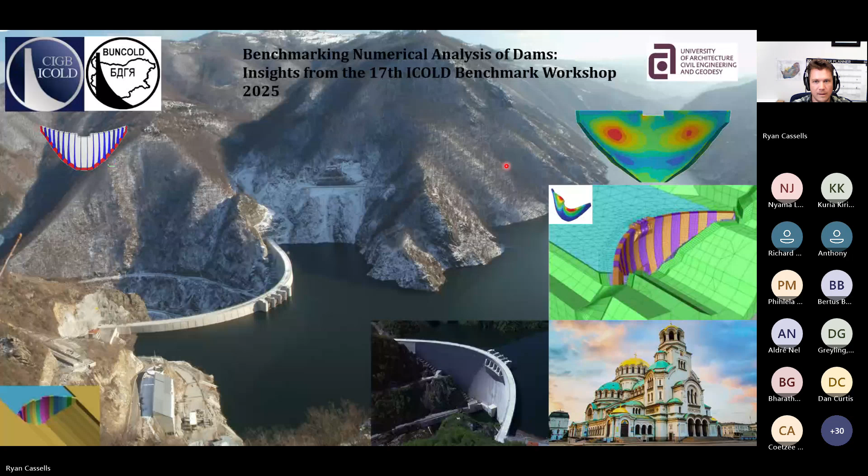Okay, thanks. As Ashley said, I'm Ryan Castles from ARQ Dams. The topic of my webinar: benchmarking numerical analysis of dams, insights from the 17th ICOLD Benchmark Workshop.

Various organizations play a part here. It's hosted by BUNCOLD, which is the Bulgarian National Committee of Large Dams, a member of ICOLD, in association with the University of Architecture, Civil Engineering, a technical university in Sofia. This benchmark workshop was also an official ICOLD event.

Quickly going through the presentation structure: I'll start by looking at the introduction and background for those of you who don't know what a benchmark workshop entails. I'll run through the objectives and scope of the workshop, look at the topics that were studied, as well as the various contributors and participants. I'll look at the modeling approaches and results, highlight some of the key findings, and quickly discuss the site visit that they did, which unfortunately I was not there for, but it was quite interesting. I'll also look at some extras as a bonus, and end with a conclusion.

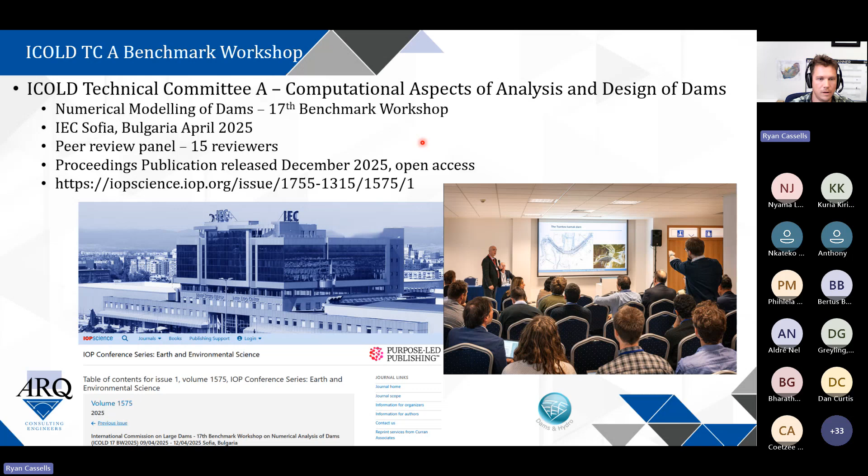The ICOLD Technical Committee A, as Ashley said I'm the South African representative there, was formed in 1988 by ICOLD. The objective and goal was to verify correct implementation of theory, based on the finite element method in dam engineering. Just to stress, this is structural analysis, finite element modeling, not computational fluid dynamics, which a lot of dam engineers also use, but that's more in terms of hydraulic flow. This is strictly finite element modeling for structures.

The benchmark workshop is held every 2 years. I think the first one was in 1991. After that, they normally do capitalization of the findings and publications. There are also bulletins released every now and again by Technical Committee A: Bulletin 94 from 1994, Bulletin 122, 155, 202, and 206. These bulletins all basically give information related to numerical modeling of dams.

The chair of the committee is Antonella Frigerio, she's from Italy, and the co-chairs are Russell Gunn, a Swiss gentleman, and Gerald Zenz from Austria. There's a photo of me when I attended the benchmark workshop - Antonella, the lady with the black hair, to her right Gerald, and to her left Russell, and obviously you can see me.

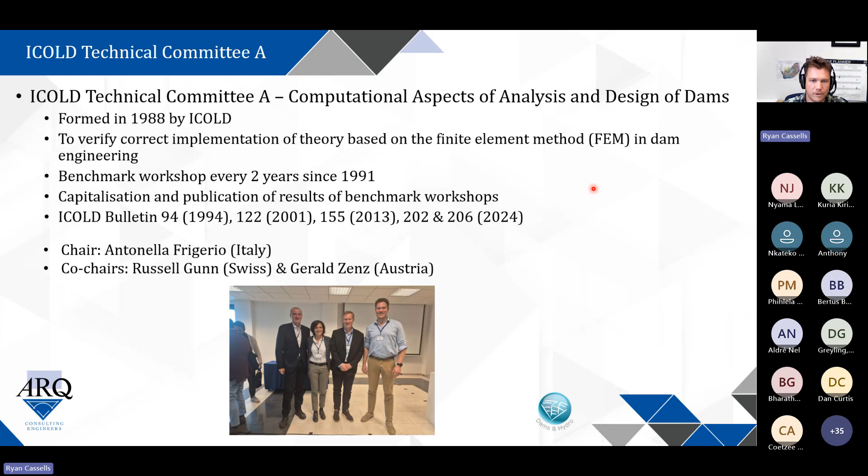As I said, the benchmark workshop was hosted by BUNCOLD, the Bulgarian National Committee of Large Dams. They've been a national member of ICOLD since 1938. The chairman is also a professor at the UACEG, which is one of the event organizers - his name is Dimitar Kislyakov. The vice chairman is Dimitar Popov, and the honorary chairman is Dimitar Chashev. So I think if you live in Bulgaria, there's a high probability your name will be Dimitar. A photo on the left shows the building at the university. The benchmark workshop took place in Sofia, Bulgaria, which is the capital of Bulgaria, in Eastern Europe.

Interesting enough, it's one of the oldest European cities. It's been inhabited for 7,000 years. It's actually older than Rome, Paris, and London.

The city is located directly next to the Vitosha mountain in the Balkans mountain range, so ideal setting for dams. Bulgarians love yogurt, and they swear by getting longevity from it. They also enjoy drinking rakia, a fruit brandy, socially, and they swear by it as a cold remedy.

Some of the photos in the middle show the city skyline with the beautiful mountains in the background. A map shows where Bulgaria is and the capital, Sofia. On the right, a famous photograph of the Alexander Nevsky Cathedral.

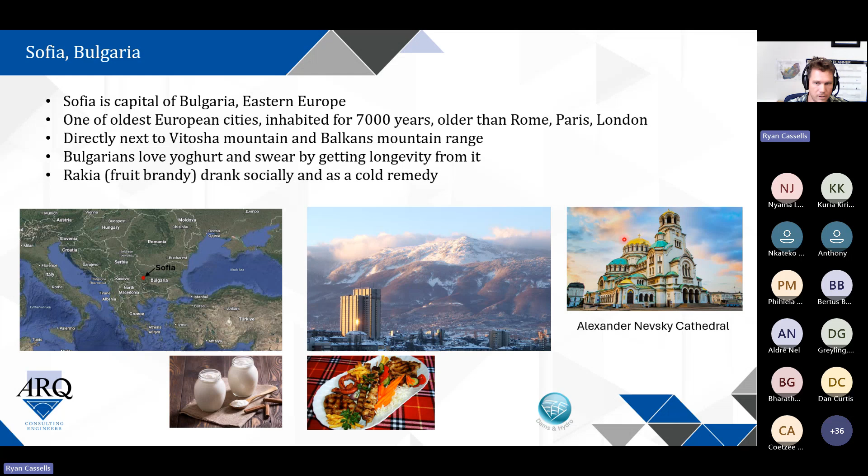Let's go to the next slide. Sofia is also rich in culture and eclectic architecture. You can see all the beautiful colors of the different buildings. The city is also located above natural hot springs, so when you walk around the city, you'll see various points where people are able to freely collect heated spring water from taps.

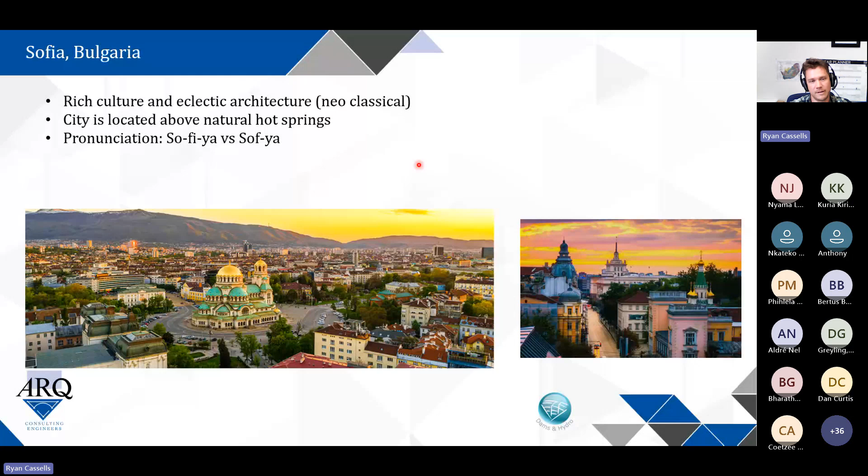One of the things that Henry John joked with me about before I went is that in Sofia there's a bit of a thing about how the name of the city is pronounced. Is it Sofia or Sofia? I can't remember which is correct, but I know some locals get irritated by tourists. I think the correct pronunciation is Sofia, but a lot of people say Sofia. Just an interesting fact.

Okay, let's get to the dam. As I said, Bulgaria is a very mountainous area, perfect conditions for dam building. Some of the notable large dams in Bulgaria: the Vacha Dam, a 144-meter high concrete gravity dam, on the left photo. The Studen Kladenets Dam, in the middle, a 68-meter high concrete gravity dam. The Kardzhali Dam, top right corner, a 103-meter high concrete arch dam. And the Tsankov Kamak Dam, 130-meter high concrete arch dam. So there are some really cool dams in the area.

The dam on the bottom right actually features in the benchmark workshop studies, so we'll unpack that dam a little bit more.

So how would one define a numerical modeling benchmark workshop? It's an international gathering of numerical modeling experts in structural dam engineering. The contributors undertake predefined numerical analysis studies of selected dams. The model parameters, assumptions, and analysis considerations are normally, to a large extent, standardized.

This is to try and pick up if there are differences in the outputs, not necessarily from different modeling assumptions, but to find where these differences arise from and what causes them. Contributors undertake these studies using their preferred numerical modeling software and processes.

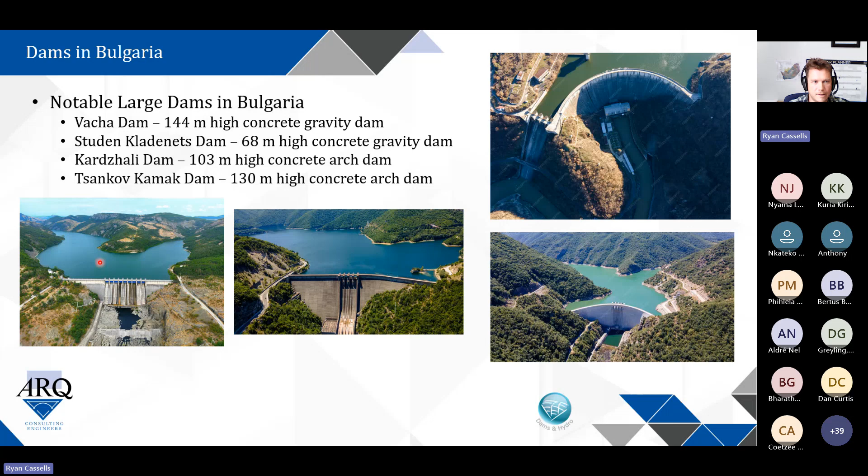The aim and objectives of a numerical modeling benchmark workshop are to compare study outcomes and results between contributors and FEA software packages, to identify and explain significant differences between the outputs and results, and to provide analysis reference points for newly developed software, newcomers, or participants.

For instance, if you're a dam engineer venturing into numerical modeling with a complex problem, and you want to buy a new software package, how do you test it? You can use the benchmark proceedings for that.

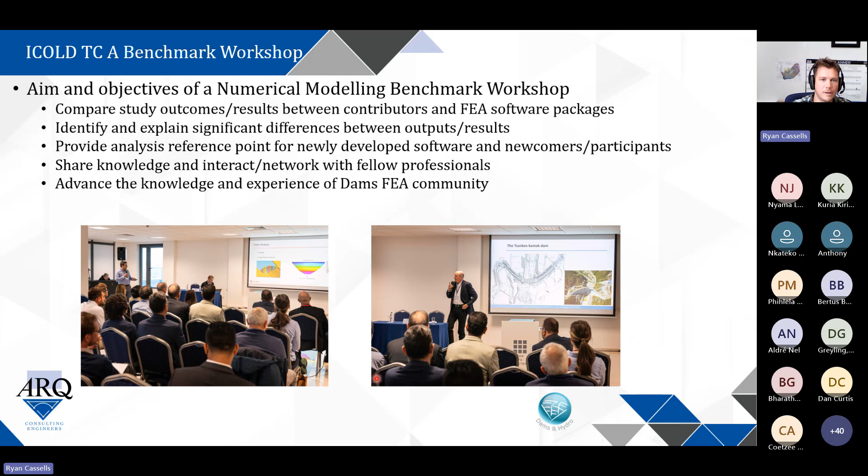As I said, there have been various benchmark workshops before this one. Other objectives include sharing knowledge and interacting or networking with fellow professionals, which is also the main purpose of this webinar - for me to share what I learned at the workshop with SANCOLD members, and to advance the knowledge and experience of the DAMS FEA community.

So the workshop structure and content: basically, prescribed FEA studies are formulated by the TCA, Technical Committee A, defining analysis requirements and reportable results. The formulation is released online in advance together with workshop dates and a venue.

Interested contributors can undertake these studies using their preferred numerical modeling software. To partake in a benchmark analysis in a workshop, you don't need to be a member of ICOLD or SANCOLD. It's free for anyone to participate.

The formulations are normally freely uploaded or available on the ICOLD website, or the ICOLD website will refer to the specific website set up for the benchmark workshop.

The analysis results derived by contributors are submitted to the organizers. So once all the various contributors do their work, they submit it. The organizers assimilate, evaluate, and summarize the findings and make comparisons between the outputs. The organizers and contributors then present the findings in a conference-style workshop, and eventually the proceedings are published.

Just for interest's sake, for this workshop there were 13 contributors from 9 countries, and over 50 workshop participants. So you can either be a contributor or a participant. If you're a contributor, you actually take part in the exercises, or you can just be a participant, pay the fee, attend the workshop, and learn from it.

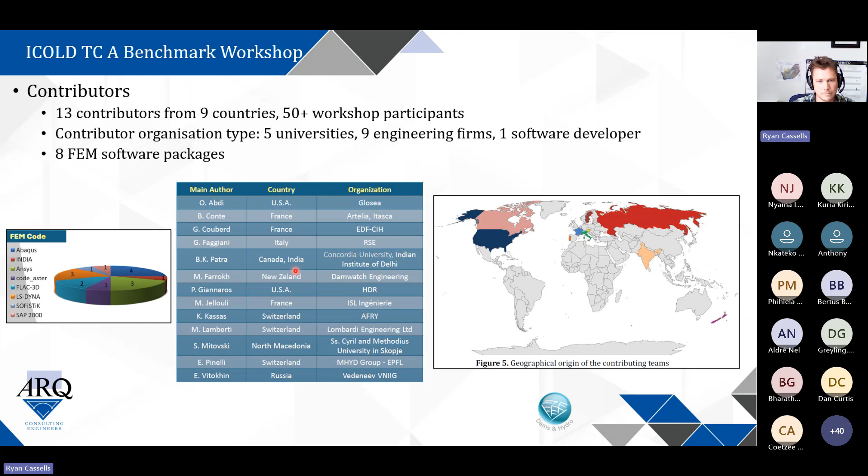The workshop had 3 themes. Each of these themes is represented by a different type of dam. Theme A was 3D seismic analysis of the Tsankov Kamak concrete arch dam, which I showed you a bit earlier.

Theme B looked at the first impoundment of the Plovdivtsi embankment dam, which is an asphalt concrete core rockfill dam. Theme C was calibration and prediction of the rockfill behavior of the 210-meter high Nam Ngum CFRD dam. That's actually not in Bulgaria - that dam is located in Laos, but the dams for Theme A and Theme B are Bulgarian dams.

You can see the photographs: on the left, the Arch Dam; in the middle, the Plovdivtsi Dam; and on the right-hand side, the Nam Ngum 3.

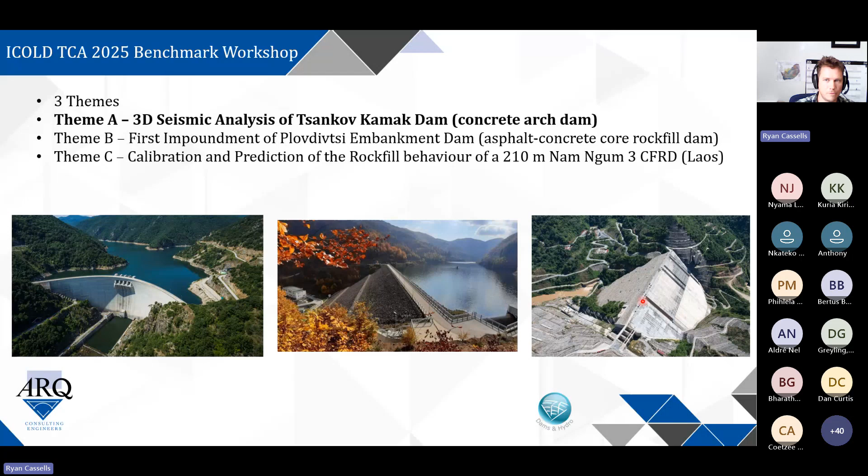For purposes of this webinar, I'm only going to look at Theme A. There's quite a lot to unpack, and it would be impossible to do all themes in 1 hour. But the proceedings are there, and for those who want to look at the embankment dams and the rockfill dams, you're more than welcome to have a look at that.

So that Tsankov Kamak Dam: 130-meter high double curvature concrete arch dam, 486-meter crest length, reservoir capacity of about 100 million cubic meters, spillway capacity of 1,450 cumecs, hydropower capacity of 80 megawatts, and rock mass geology comprising metamorphized biotite gneisses.

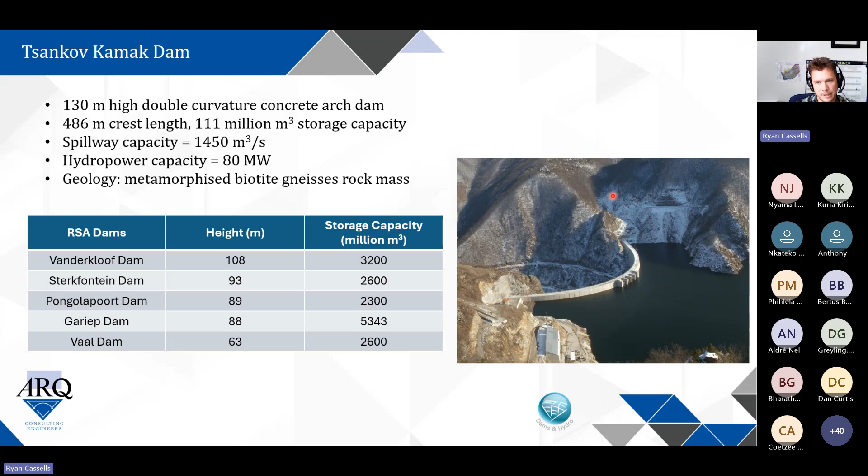Just to compare the size of the Tsankov Kamak Dam, as I said, 130-meter high, in the table I've got 5 large dams in South Africa: Vanderkloof, Sterkfontein, Pongolapoort, Gariep Dam, and Vaal. You can see that in terms of the height of the structure, the Tsankov Kamak Dam is really a big dam, larger than all our largest dams. But obviously, if you just look at reservoir capacity, it's not as much as what our dams hold. Purely from a structural point of view though, it's a very large dam, 130-meter high.

So Theme A, as I mentioned, is the 3D seismic analysis of Tsankov Kamak Dam. The objective and purpose of Theme A is to identify and evaluate findings that contribute to the development and better application of advanced methodologies for static and seismic analysis of concrete dams, to compare results from linear and nonlinear analyses, to compare analysis results across different modeling approaches and software - highlighting similarities and discrepancies - as well as to understand the potential for various modeling approaches or software to yield results having quite a broad spectrum at times, and also to allow engineers, researchers, and software developers to discuss their solutions to given analysis problems.

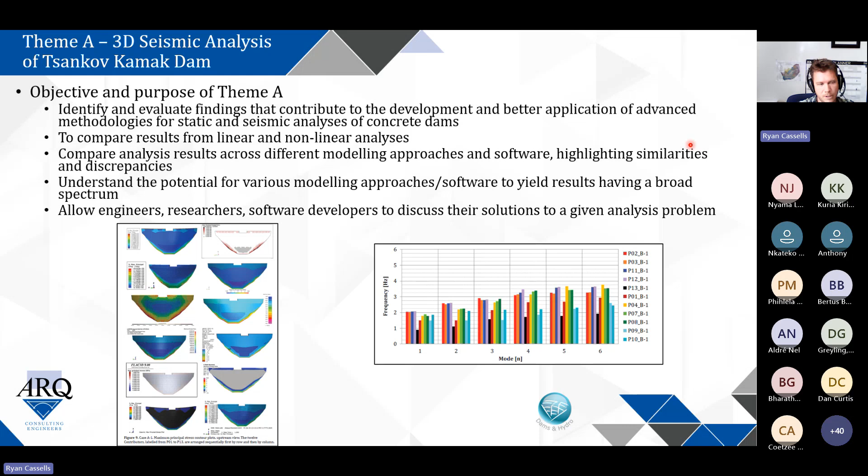Here are just 2 images, plots taken from the proceedings. I'll go through the details of these later.

Theme A had 6 case studies looking at different loading conditions. Obviously these case studies also had sub-case studies, so you can see there's quite a lot of analyses taking place here for the contributors.

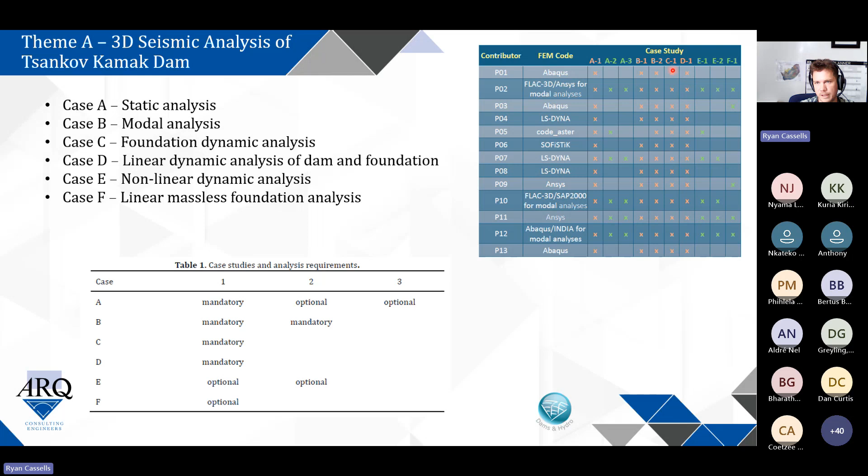On the table on the right-hand side, the contributors are divided into numbers. Random numbers were assigned just to not expose the various participants in terms of their name or organization. You get contributors P1 to P13, the FEM code that they used, and which of the case studies they actually undertook under theme A.

Case study A1 is a monolithic linear analysis of the dam. Case study A2, a nonlinear analysis, adopting nonlinearities at the contraction joints between the blocks of the dam, with the intention of getting a stress distribution there. Case A3, nonlinear analysis at block interfaces and at the dam foundation contact.

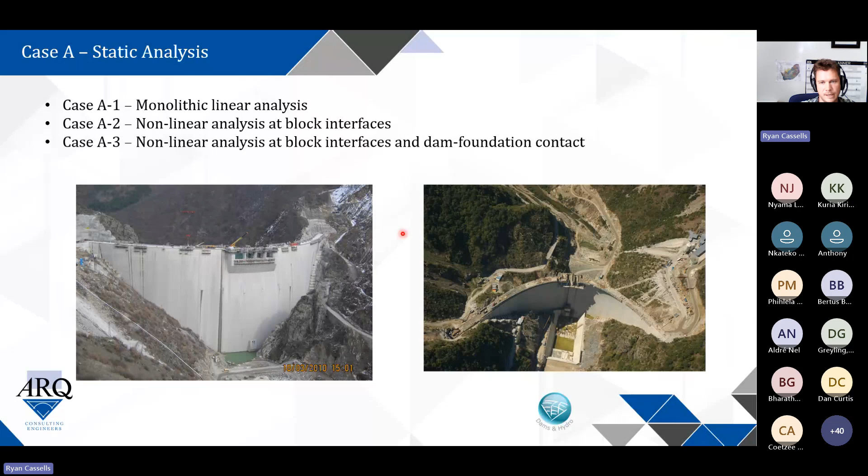Some of the dam and reservoir data that needs to be input for the modeling: the dam crest elevation, 688 meters above sea level, dam crest length 486 meters, the crest thickness, base thickness - don't need to go through all of them. What is applicable is the annual average water level of 679 meters above sea level, considered your normal loading conditions for this analysis. So for static and hydrodynamic loading, this is the number to consider.

The dam body details: the dam body is a parabolic arch profile, containing 300,000 cubic meters of concrete. The dam was constructed with 23 blocks or monoliths, each 20 meters wide. Between the blocks at the contraction joints, 100 millimeter shear keys were constructed to get monolithic behavior across the arch, and the joints were later grouted as well.

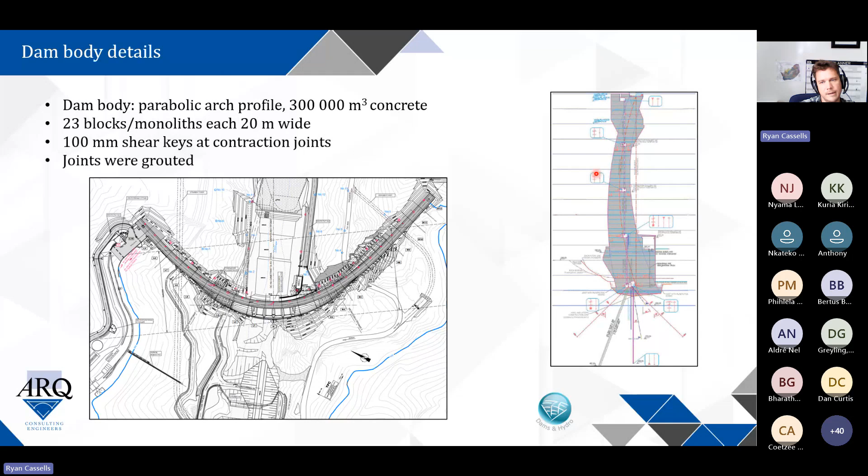Here's a nice plan view of the dam arch showing the setting out of the site, the contours, the valley. On the right-hand side, a cross-section of the crown or central cantilever, which is basically the tallest or highest part of the dam, the deepest portion of the river valley.

For contributors taking part in the analysis, the mesh of the dam and foundation was actually provided. This is to try and eliminate differences in analysis results from people having different meshes, different element types. So geometry was provided as well, but a mesh of the dam and foundation was provided for the contributors to use in their analyses.

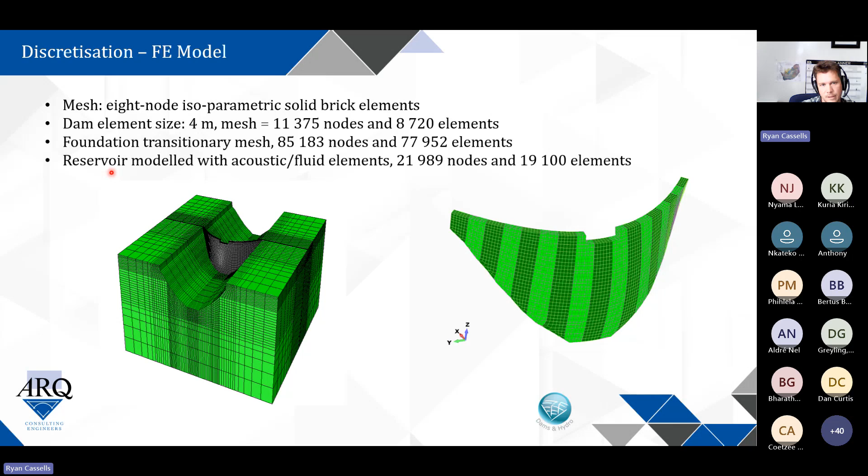The mesh comprised 8-node isoparametric solid brick elements, the dam element size being 4 meters. You can see on the right-hand side the mesh of the dam, very nice, neat mesh, good aspect ratio. The foundation transitionary mesh has 85,000 nodes and 77,000 elements, and the reservoir was modeled with acoustic or fluid elements, 22,000 nodes and 19,000 elements.

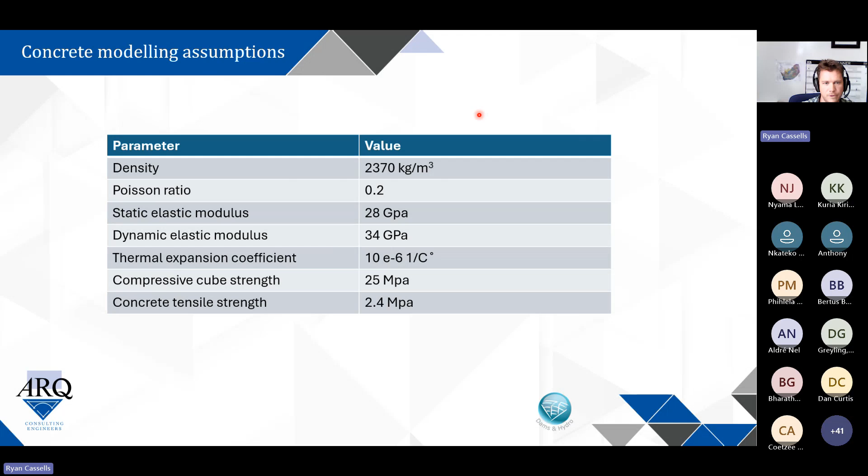The concrete modeling assumptions given to the contributors: density of concrete 2,370 kilograms per meter cubed, Poisson ratio 0.2, static elastic modulus 28 gigapascals, dynamic elastic modulus 34, thermal expansion coefficient 10 e to the minus 6, compressive cube strength 25. So it's all quite standard concrete properties.

The foundation modeling assumptions: density 2,675 kilograms per meter cubed, Poisson ratios, then your rock mass shear strength - a cohesion of 1.5 MPa and a friction angle of 60. You can clearly see that's quite high shear strength parameters indicating nice competent rock mass, and a static elastic modulus of 28 and dynamic 34, derived from a shear wave velocity of 2,220 meters per second.

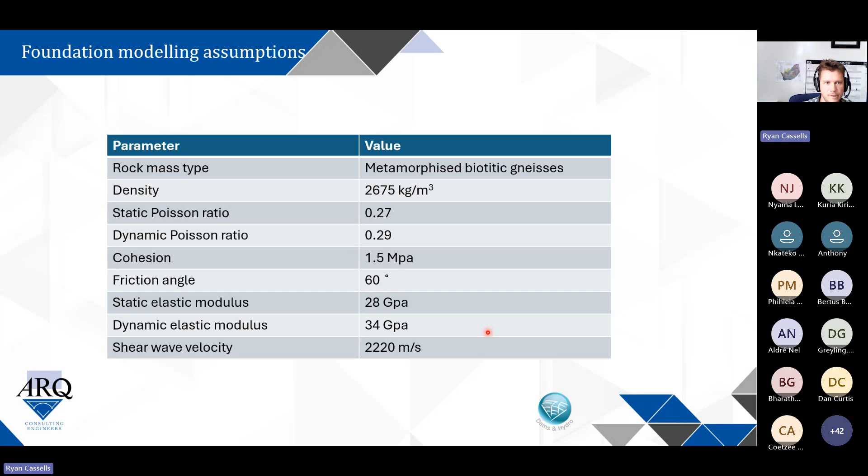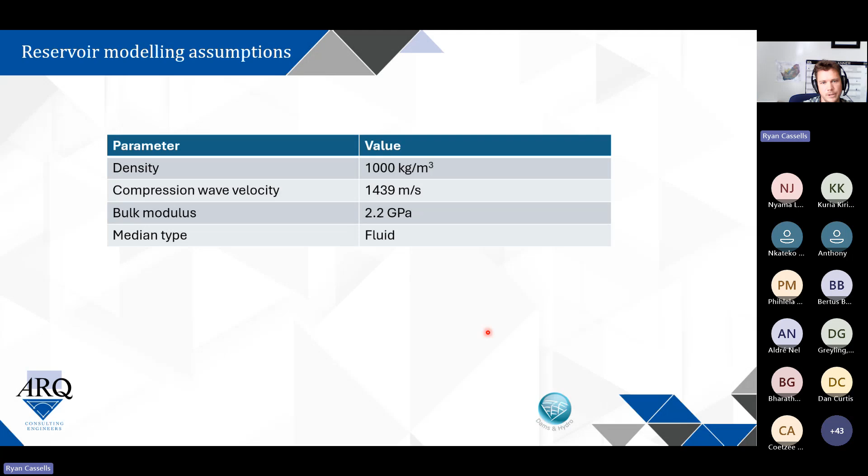The reservoir modeling assumptions: the density of water 1,000 kilograms per meter cubed, pretty standard. Compression wave velocity 1,439 meters per second, the bulk modulus 2.2 gigapascals, and the medium type fluid.

Okay, so for case study A1, analysis assumptions: monolithic linear static analysis. So not modeling any nonlinearities, not at the contraction joints, nor at the interface between the dam and foundation. The dam concrete modeled as linear elastic.

The loading: hydrostatic, gravity, and drained uplift. And the foundation extents restrained against translation. So it's all quite standard and normal hydrostatic, linear elastic analysis.

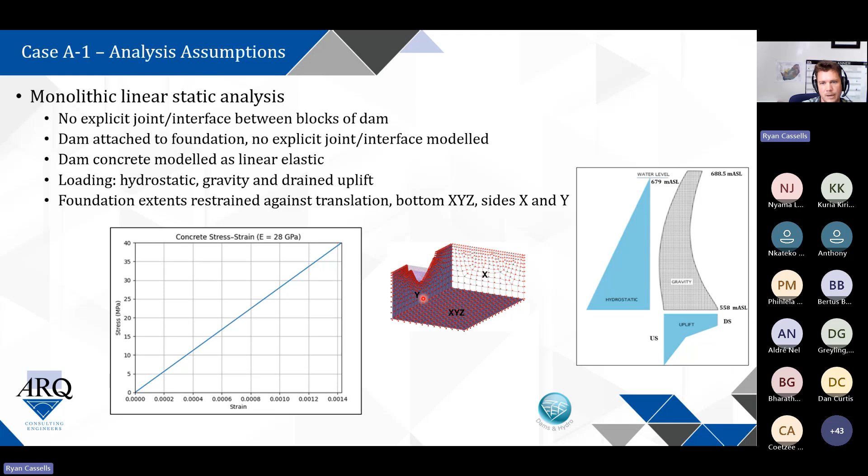Other required results from the contributors being the minimum and maximum hoop stress on the downstream and upstream face, as well as the minimum and maximum vertical stresses also on the upstream and downstream face of the central cantilever, and then also contour plots of the major principal stresses. Normally these major principal stresses give us an indication of where we can expect tensile stresses to develop in the dam.

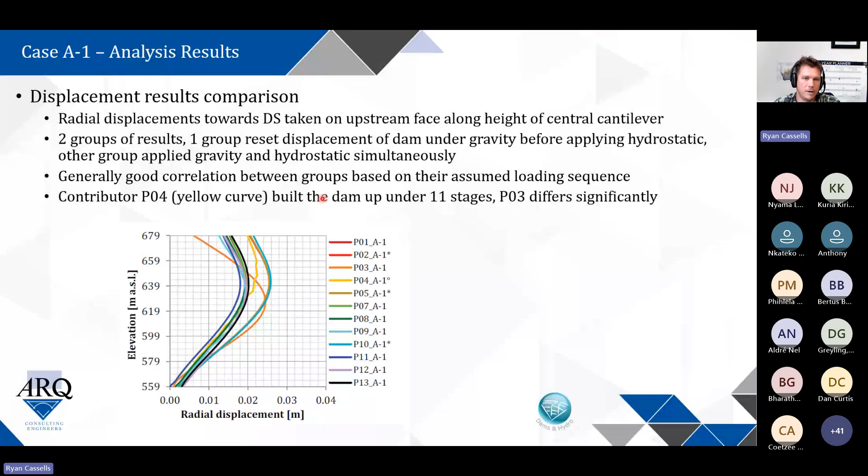P3 also, the orange curve, showing quite a lot of difference from all the rest of the contributors. But generally you can see there's a good correlation between the groups, both based on the assumed loading sequence, apart from P3 really.

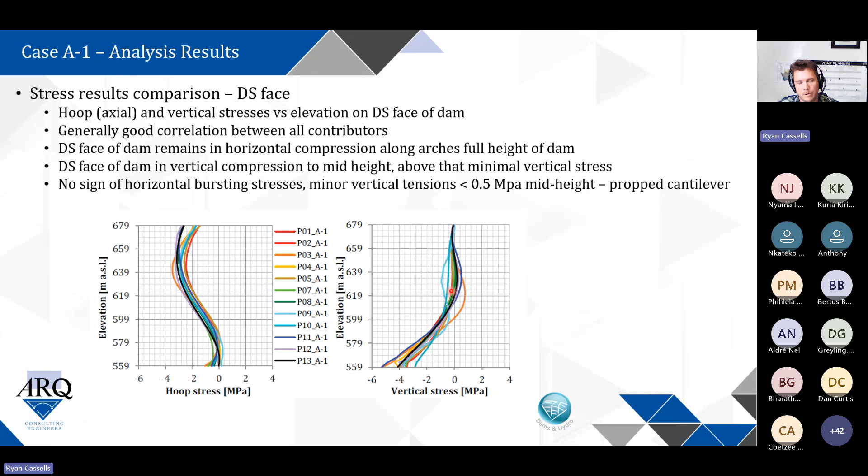There's also no sign of horizontal bursting stresses. There are minor vertical tensions that form just above mid-height of the dam, in the region of about 0.5 MPa. This is just due to the structural propped cantilever effect - basically you've got a cantilever which is supported by a spring. The arches provide stiffness to the cantilever, so you get a little bit of tension developing there, as you would if you had a propped cantilever with a hogging moment.

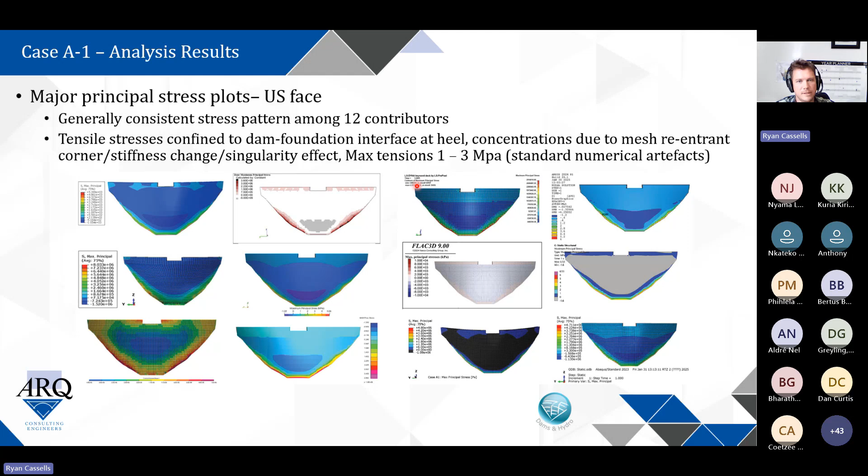Case study A2 is basically the same as case study A1, except that nonlinear material modeling properties were adopted at the contraction joints between the monoliths. It's basically an explicit joint given a very low tensile strength, as close to possible to 0. The normal and shear stiffnesses were given a value of 1 to the 12 pascals per meter. This is all according to the inputs from the organizers. The dam is still attached to the foundation, so there's no explicit joint at the dam foundation, only between the actual blocks. The loading, again, is just hydrostatic, gravity, and uplift.

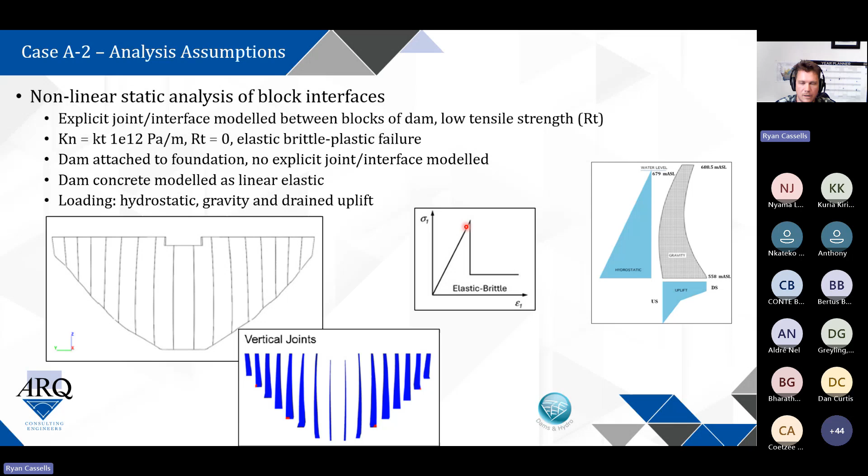There's a typical material model showing elastic brittle behavior, so you get a linear elastic stress-strain curve until the point of failure, and then a large drop in the stiffness.

Again, generally a good correlation. The results between A1 and A2 don't differ drastically - there are small differences, which is expected because there's not much tension really forming across those contraction joints, as would be the case if this was a seismic analysis, which we'll get to later. But under normal loading conditions, hydrostatic, most of the stresses stay in compression.

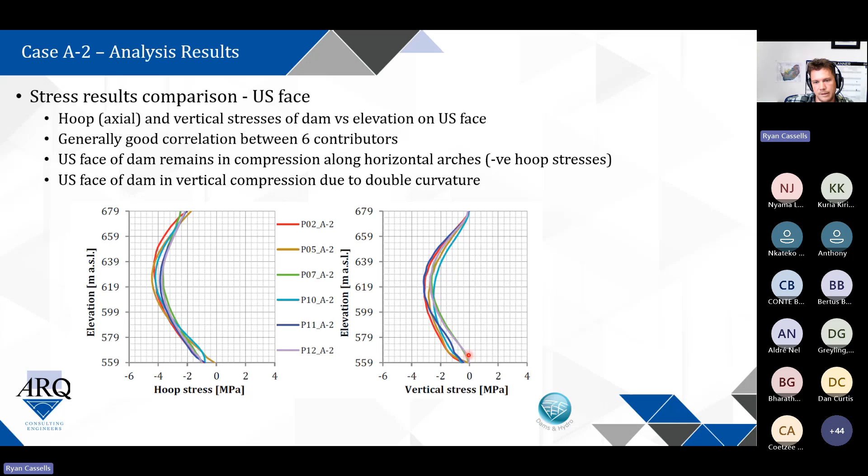What is interesting to note is that on the upstream face at the heel of the dam, you don't get that development of large excessive tensions which we showed earlier. This is because there's no actual discrete joint model at the dam and foundation, but that tension is actually released across the expansion and contraction joints. So that's why you don't get any tensions forming over here.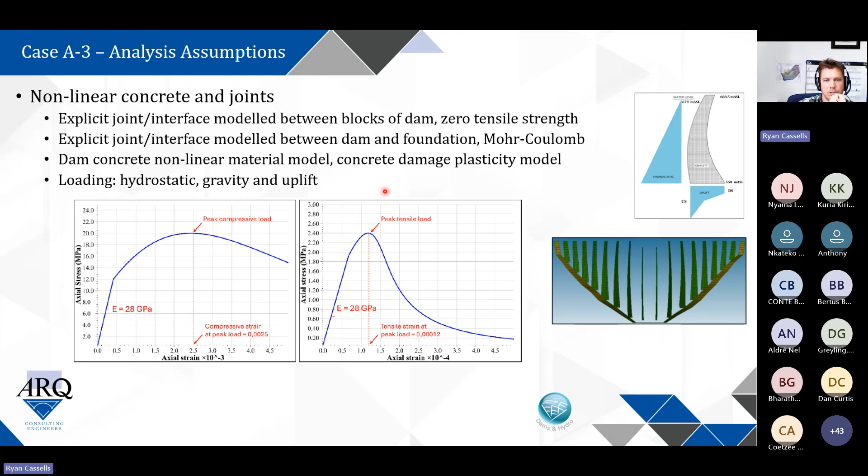The displacement results comparison is very similar again to the previous ones. This time we only had 5 contributors submitting for case study A3. The results don't differ much between A2 and A3. Once again, there's not a lot of tension under normal loading conditions, so you wouldn't see large differences.

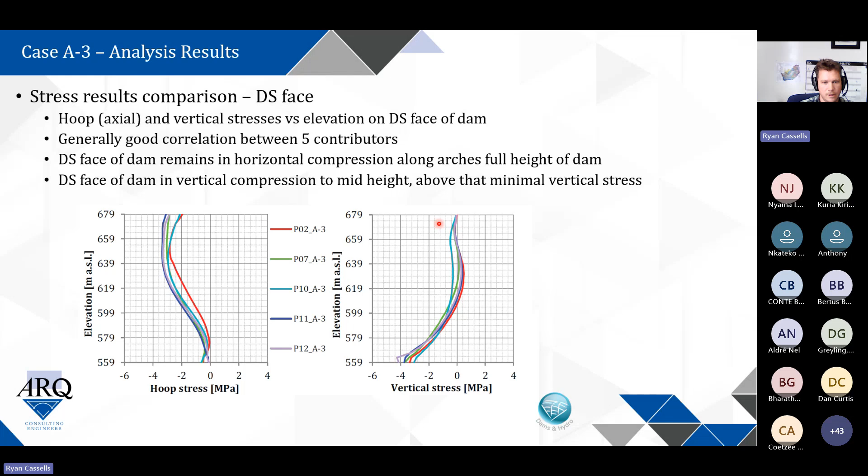Stress results on the upstream face, similar thing, don't need to repeat that. On the downstream face as well, hoop stresses on the left, vertical stresses on the right. So for case A findings, that's the end of case study A.

Stages of hydrostatic loading affect the displacement of the dam. The displacement of the dam under gravity is normally built out in real life, but it also depends on the impoundment strategy - is the dam built and impounded at the same time? For instance, at Katse Dam, that's how they did it. Other dams are constructed to crest level and only impounded later. So it all depends on what the construction sequence is.

Linear elastic hydrostatic loading of concrete arch dams indicates exaggerated tensions at the heel. I actually did a paper presenting this in 2024 for SANCOLD with my co-author, Dr. Wright. So you can see the stuff we've been presenting at SANCOLD correlates quite well with what the guys are doing at the benchmark workshop.

Use of nonlinear material models allows for redistribution of tensile stresses at the heel and across the joints. If I remember correctly, I think that was for the Olifantspoort project where I presented that. So that's quite a useful feature, using nonlinear material models.

What is important is that the selection of a nonlinear material model is very critical to how the stresses are redistributed. There are obviously so many different types of models out there. You need to make sure you select a model that really represents your site conditions and one that's been tried and tested, and do some V&V analysis just to see what comes out. There's also various nonlinear models for modeling the brittle fracture behavior of concrete.

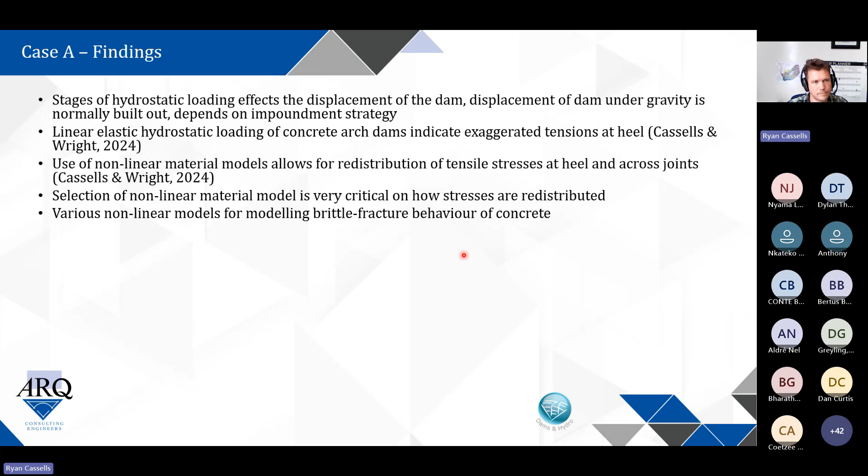Moving on to case study B, which is a modal analysis. Case studies B1 and B2, the only difference being that case B1 incorporates a foundation with mass, while case B2 is a massless foundation. The outputs required were the first 15 natural frequencies of the dam, the corresponding mass participation for each of these mode shapes, and the dam mode shapes for the first 5 natural frequencies were also required.

Basically, modal analysis is quite a straightforward thing - it's just an eigenvalue analysis. This is normally one of the first steps you would do if you were to do a dynamic analysis, or specifically a seismic earthquake analysis. This gives you an indication of

how the dam will respond under seismic loading in terms of what its natural frequencies are and the mode shapes. You can then compare this to the frequency content of your acceleration input or earthquake input, and you can get a good indication of the sort of excitation you'll get under seismic loading. You also need this to look at or define your damping, to see where the mass participation is.

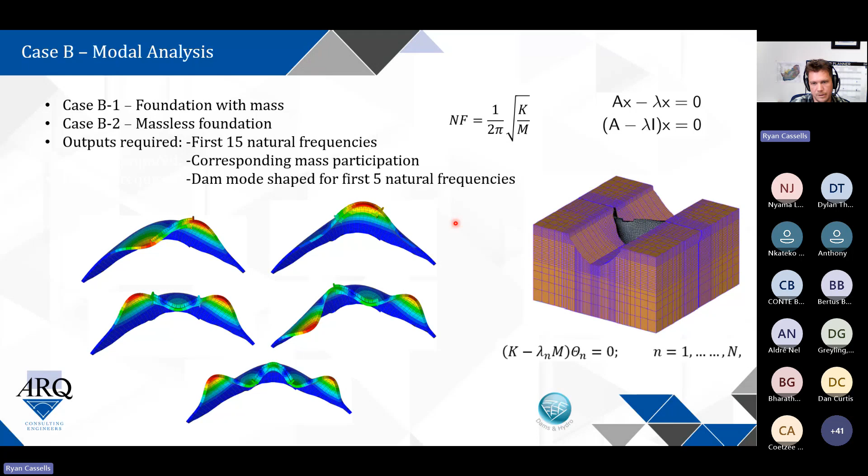For Rayleigh damping, we go to some structural dynamics equations. The natural frequency is a function of the square root of your stiffness over your mass. Here's the eigenvalue function, lambda, to solve your eigenvalues - basically your different mode shapes and frequencies as indicated here.

So what's important here is that when doing the modal analysis, you need to model the dam, foundation, and reservoir, because under seismic excitation, the whole dam-foundation-reservoir system acts as a coupled structural system, and they will interact with each other.

There are various techniques to actually model your fluid-structure interaction. Different software use different approaches. As you can see, this table summarizes the software codes as well as the fluid structure interaction approach and the fluid type used by the various participants, contributors P1 to P13. Again, Abaqus, ANSYS, Code Aster - all the well-known software are there.

For fluid structure interaction, a lot of people still like to use Westergaard added mass. Obviously there are pros and cons for that. You can also use acoustic mechanical coupling.

You can model the actual reservoir as a fluid body, or you could use acoustic elements, depending on what's available in your software. And the fluid type can be modeled as incompressible or compressible.

So for Westergaard added mass, basically you're just adding mass to the structure, so you're not getting a stiffness effect. It sees the reservoir as incompressible, and it's like sticking the reservoir to the upstream face of the dam, providing additional mass to the structure. Theoretically speaking, acoustic or fluid elements are more mathematically correct, but it's been shown that

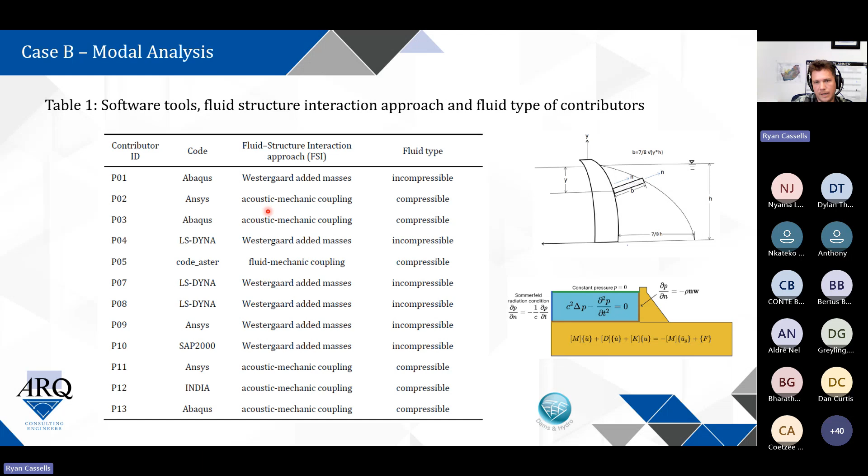Westergaard added mass generally also gives good results. The results for the modal analysis, natural frequency results comparison.

This is again case B1, which is a Mass Foundation. You can see the first 15 modes, all contributors, the contributors using advanced FSI fluid structure interaction, and the contributors using Westergaard added mass. The organizers actually split them, knowing that you'll get significant differences.

Let's just look at the first mode. For all contributors, the mean natural frequency is 1.76, the median 1.85, and the standard deviation 0.36. Contributors using Westergaard added mass have a marginally lower natural frequency, because there's more mass, whereas for fluid structure interaction the natural frequency is marginally higher than Westergaard added mass.

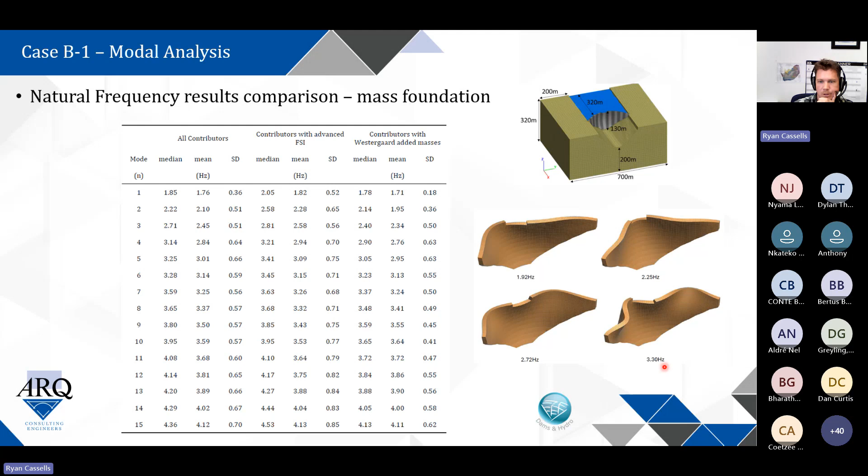Some images just showing some of the outputs of the mode shapes for the dam. Frequency is 1.9 hertz, 2.2, 2.7, 3.3 — so that's mode shape 1, 2, 3, 4.

This bar graph shows a direct comparison of the first 6 modes of the various contributors. You can see again there's good correlation between the natural frequencies. For mode 1, these contributors had close to 2 hertz, and these contributors were quite similar, apart from contributor 13, the black bar chart, which shows significantly lower natural frequencies than all the other contributors.

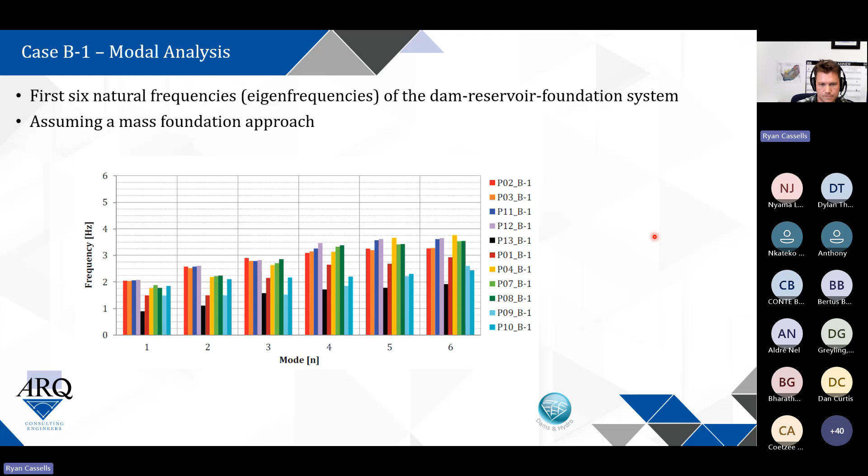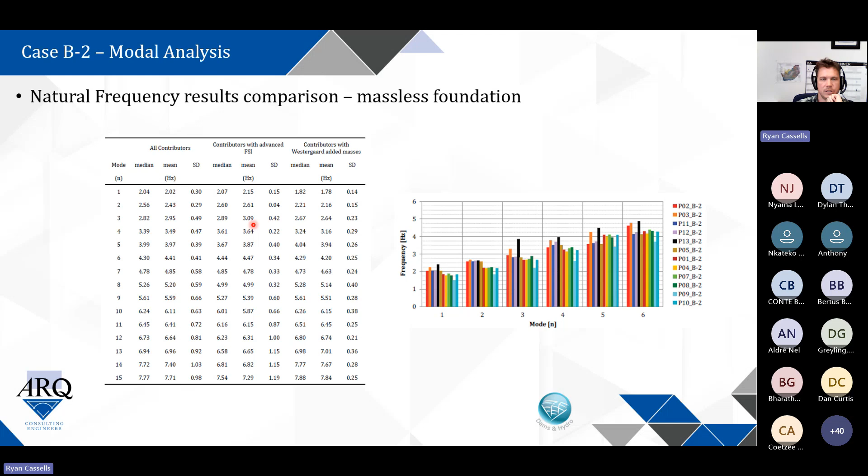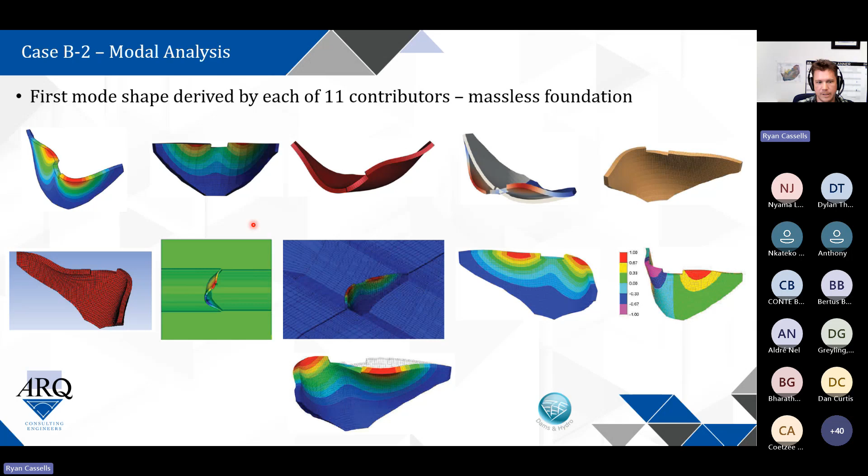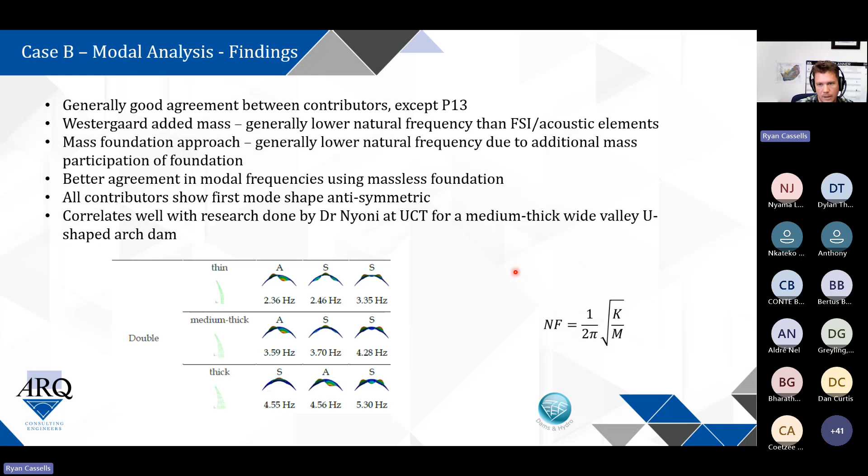This actually correlates very well with research done by Dr. Nyoni at UCT for a medium thick wide valley U-shaped arch dam. Dr. Nyoni and Prof. Moyo at UCT have done extensive studies on mode shapes of arch dams in relation to the valley width and the thickness of the dam, and whether it's double or single curvature. Here you can see for a double curvature arch dam with a medium thick arch, the first mode is normally antisymmetric, which correlates well with what was shown here at the workshop. So what we're doing in South Africa ties up very well to what the guys are doing at the benchmark workshop.

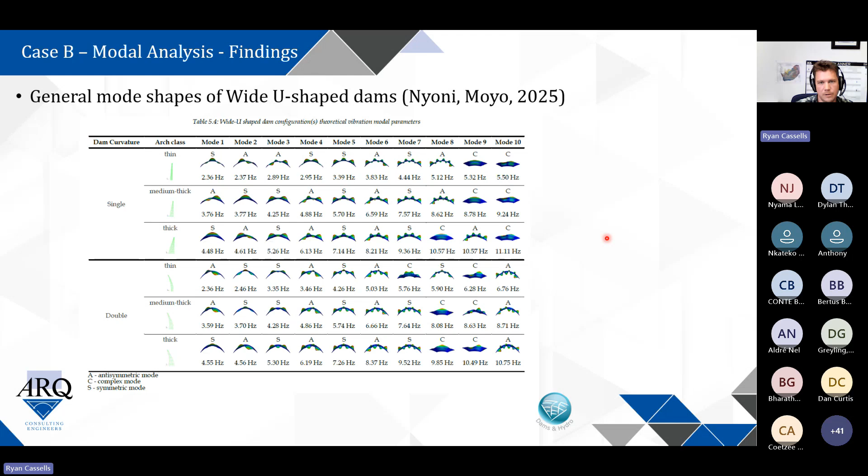So basically, in order to do a seismic analysis of a dam correctly using the mass foundation approach, you need to ensure that the seismic input applied at the base of the foundation is actually deconvolved, so that when it propagates up through the foundation to the surface, it represents the surface signal. When you do a seismic analysis, you take acceleration signals recorded at free surface conditions. There's a famous earthquake somewhere in California, recorded at surface. But now you want to apply that surface condition at the base, and it amplifies as it goes to the top.

So you need to do a reverse engineering method called deconvolution, where you reduce the amplification of the surface signal, so that if you place it at the base and it propagates towards the free surface, you get the original earthquake signal. This can be quite a complex and laborsome task, especially in 2D and 3D, but it's important to see how the various contributors do the deconvolution.

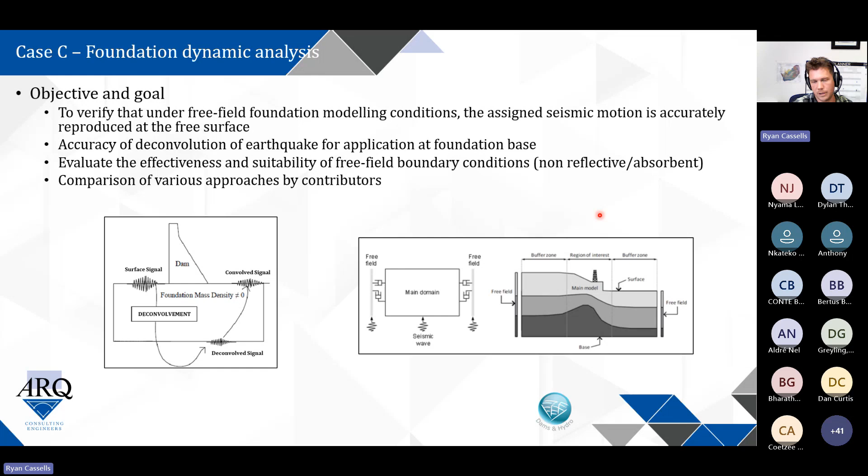On this image on the right-hand side, just showing your typical free field boundary conditions.

Also non-reflecting boundary conditions. How do the various contributors model the extents of the foundation so that they don't get reflection of the acceleration off the boundaries? So basically absorbent boundaries or non-reflective boundaries, as well as sometimes dashpots can be used, and perfectly matched layers. There are quite a few various techniques that people use to model the free field conditions for seismic analysis.

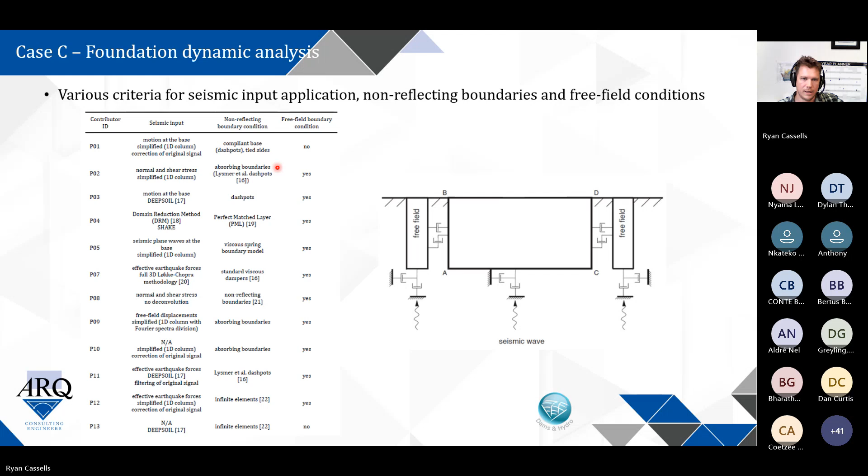Model assumptions: the finite element model of the foundation only, linear elastic material properties, the mass foundation, 0% viscous damping, absorbent, non-reflective, compliant boundary conditions, no static load, only earthquake. The earthquake acceleration signal has 3 components: in-stream, cross-stream, and vertical.

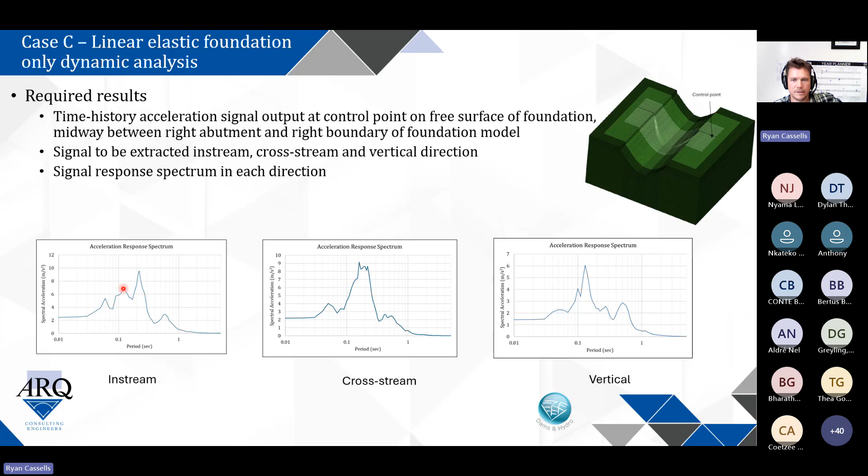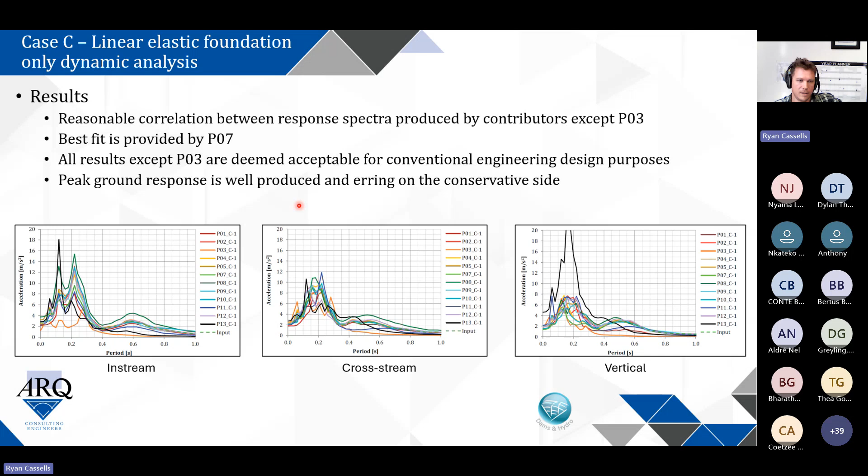The best fit was provided by participant 7, contributor 7, and all the results are deemed acceptable for conventional engineering design purposes. You can see the input represented by the dashed green line. It's quite hard to see because all the lines are on top of each other, but that dashed green line is basically your target response spectra from the original free ground surface signal, and these are the extracted response spectrum from the various contributors. In most instances, you can see it's marginally conservative, that's why I say it's acceptable for conventional engineering purposes, but most of them err on the conservative side.

Case study D is now a linear dynamic analysis of the dam and the foundation. So basically the inputs are the same; you've got the same seismic inputs, which you apply at the base of the foundation. You need to apply your deconvolved signal, which you would have derived in case C.

The objective and goal is to investigate wave propagation phenomena within a three-dimensional structural domain, with particular attention given to the effects introduced by a canyon-shaped foundation. Observe and compare amplification of acceleration at the crest of the dam in comparison to the free field earthquake signal.

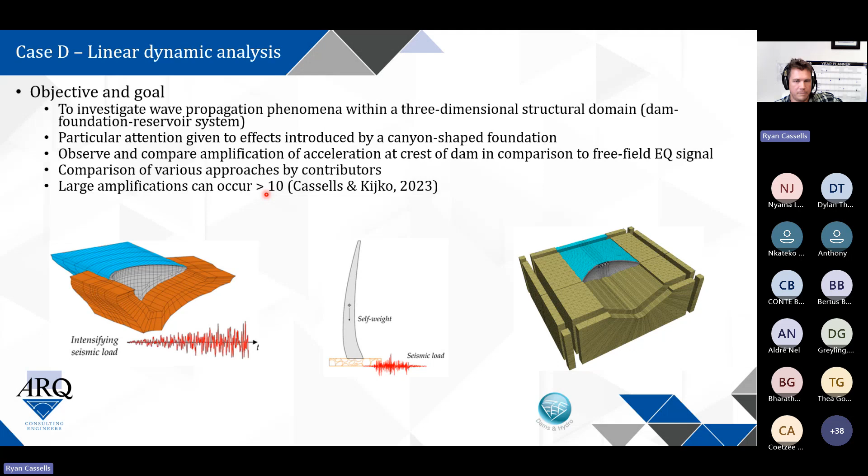Comparison of the various approaches by the contributors. Large amplifications can occur, as presented in the 2023 SANCOLD paper. You can have amplifications up the dam, from the base towards the crest, of a factor of 10. This has been recorded before on site at certain dams.

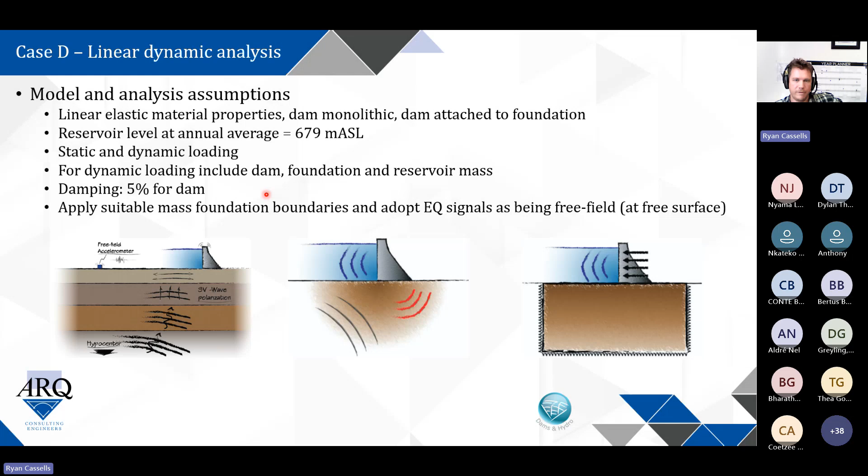The model analysis assumptions: linear elastic, reservoir at annual average level, static and dynamic loading. For dynamic loading, include the dam, foundation and reservoir mass. Damping is 5% for the dam, applying suitable mass foundation boundaries, and adopting earthquake signals as free field. Again, the three input acceleration signals were measured at free surface. I won't go too much into that again.

The required results from the contributors: acceleration time history outputs at the crest level of the central cantilever in terms of a response spectra curve, the minimum and maximum dynamic displacements, minimum and maximum hoop stresses, minimum and maximum vertical stresses of the central cantilever, and contour plots of envelopes of maximum and minimum principal stresses.

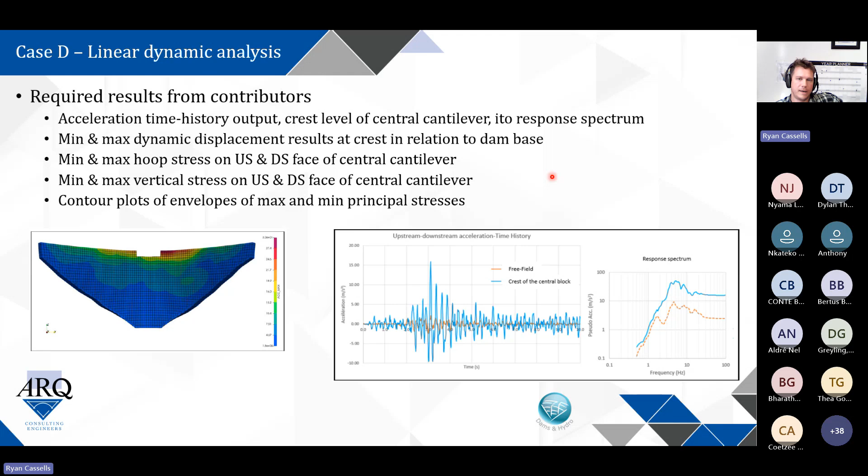For the various contributors, these show the assumptions used in terms of the fluid-structure interaction approach, the fluid type, the integration scheme for the solver (implicit or explicit), and the various software codes.

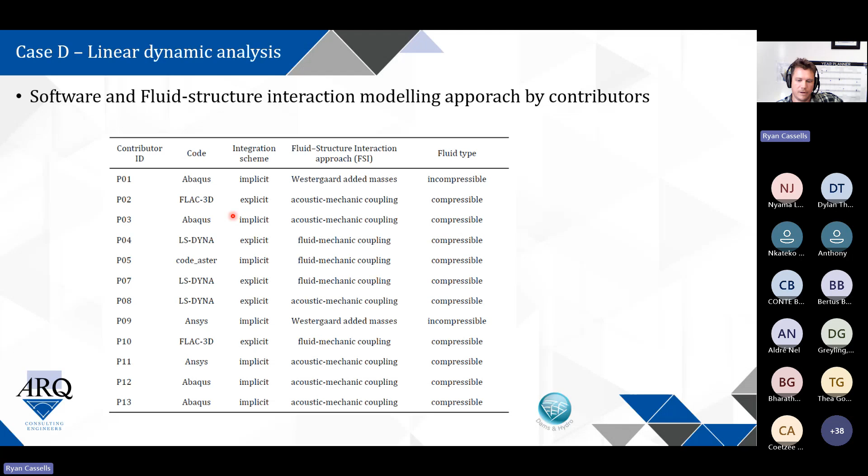Looking at the results, the response spectra plot shows the response spectra of the dam at crest level, and you can see there's quite a large range of acceleration, even at period 0, which is your PGA. Contributors 3, 4, 8, and 12 report values in the range of 10 meters per second squared. Others report 15, 20, or 30, whilst the input maximum acceleration is 2.5.

So you can see that from the base of the dam to the crest, you can get amplification from 2 to 10 times. This shows there's quite a broad distribution between results, because of the complexity in the various inputs: the seismic loading, the deconvolution, the various methods and approaches used for modeling the fluid-structure interaction, and for modeling the non-reflective boundaries. So there's quite a broad spread in results.

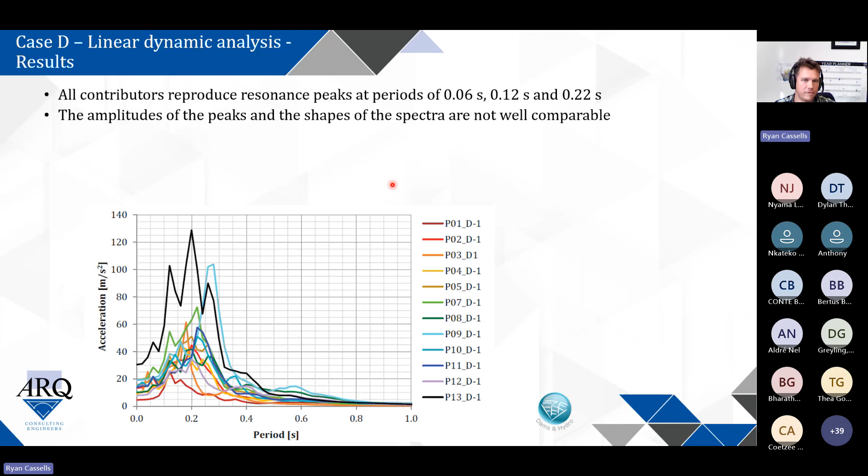There is correlation as well. The contributors all reproduce resonance peaks at 0.06, 0.12, and 0.22 seconds, although the amplitudes of the peaks and the shapes of the spectra are not necessarily well comparable.

Having a look at the radial displacements, these are envelopes of the maximum dynamic displacement results versus elevation of the central cantilever. The displacements are taken relative to the base of the dam. Because it's a mass foundation, you will have displacements in the foundation, but the base of the dam, being the top of the foundation, is taken as the reference point.

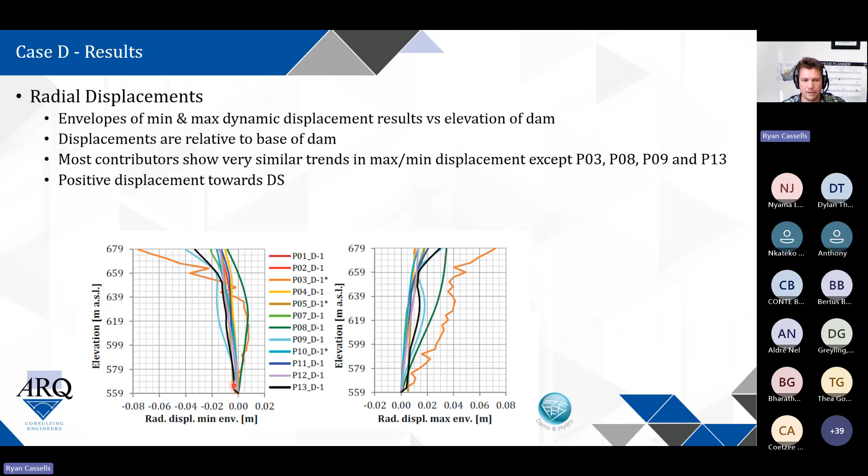Most contributors show very similar trends in the max and minimum displacement. You've got positive displacements on the downstream side, and negative displacements towards the upstream, because under seismic loading the dam oscillates between upstream and downstream. Contributor 3 shows quite a difference compared to the others, and even contributor 8, the dark green curve, differs quite a bit from the rest of the group. Otherwise, there's relatively tight agreement between the maximum radial displacements.

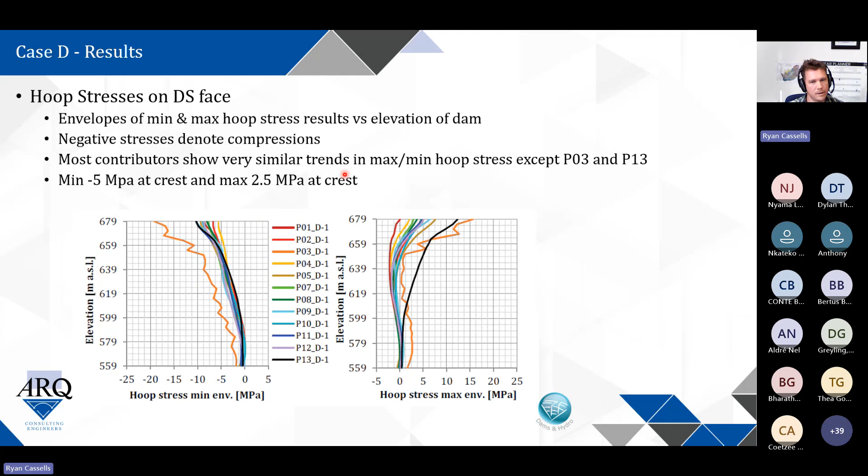Hoop stresses on the downstream face: envelopes of minimum and maximum hoop stress results versus elevation of the dam. It's a pretty similar pattern, so I won't repeat myself.

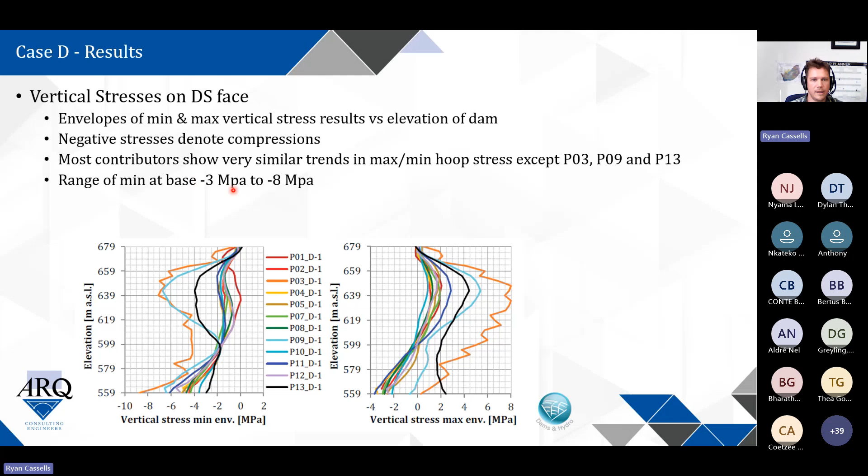Vertical stresses on the downstream face range from a minimum at the base to -3 MPa to -8 MPa, which is compression.

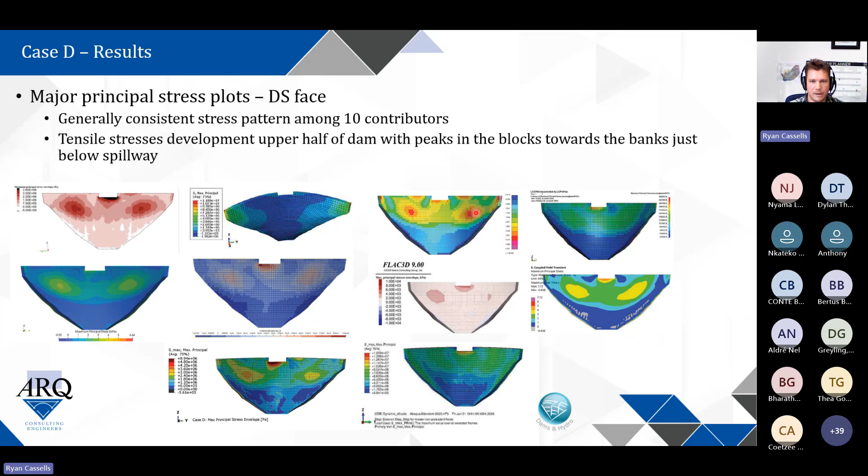Looking at the major principal stress plots of the various contributors, tensile stresses develop at the upper half of the dam, with peaks in the blocks towards the banks, just below the spillway. For instance, in this plot you can see tensions developing on the right bank, on the downstream face, and on the left bank. Most of the other plots indicate the same pattern.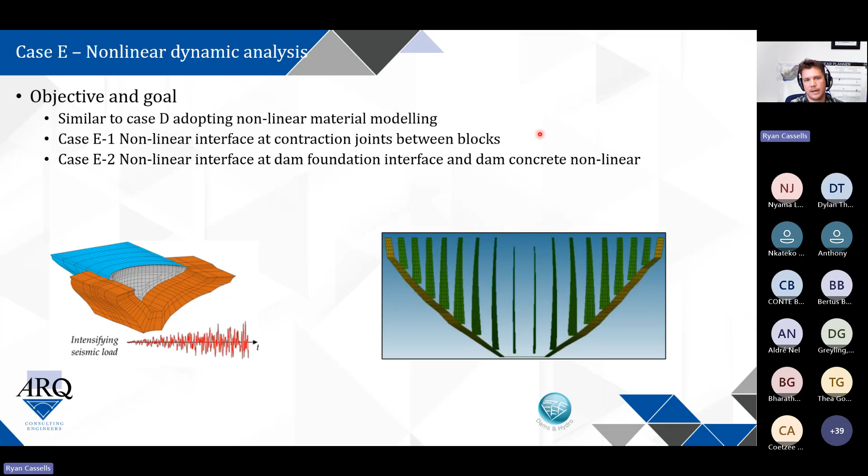Case study E is a nonlinear dynamic analysis. All the assumptions and parameters are the same as case D, except that cases E1 and E2 adopt nonlinear interfaces at the contraction joints, with E2 also including nonlinear behavior at the dam foundation interface and dam concrete.

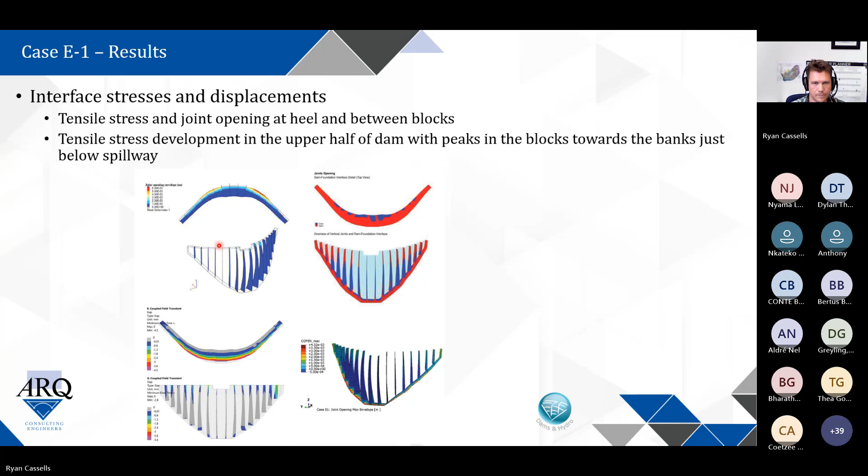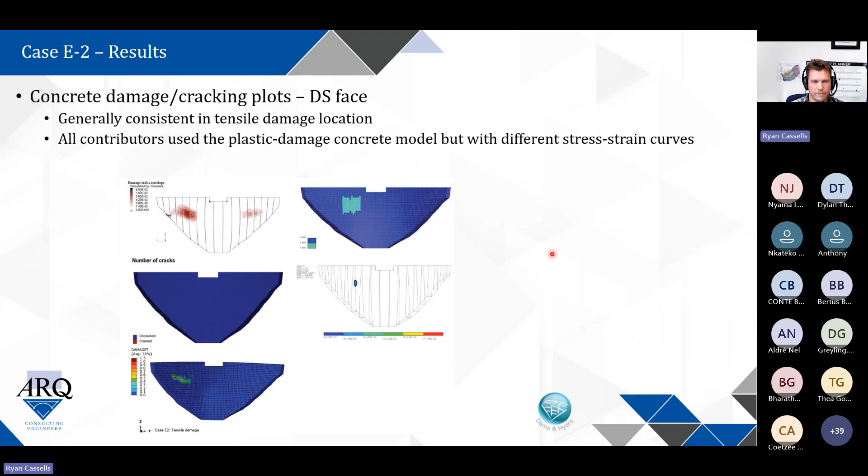Case E2, using a nonlinear material model for the actual concrete. All the result plots from the various contributors show potential fracture damage occurring on the right bank on the downstream face in that region, so there's a bit of similarity. But again, now we're going into very complex analyses where your results start to differ due to different approaches.

Case F, your massless case, which is the same as case D, seismic analysis of the dam and foundation, but now assuming a massless foundation. So there's no need for free field boundary conditions. Displacement, acceleration, and stress response of the dam are generally more conservative. With massless foundation, you generally experience no radiation damping.

The foundation is modeled only in terms of its stiffness and not mass, disregarding inertial effects. All the kinetic energy in the system applied at the foundation extents is transferred directly to the dam base, which is unrealistic, because in real life you'll have a coupled system between the dam, foundation, and reservoir acting structurally together, with the dam and foundation directly influencing each other, creating energy waves that travel through the soil away from the dam.

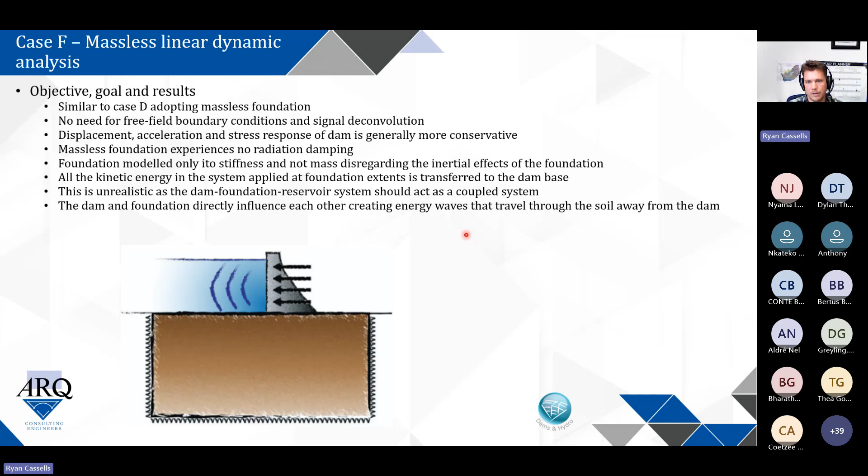So there's always the age-old debate between numerical modelers about mass versus massless foundation. Massless foundation has stiffness but no mass, no inertia, no energy storage or dissipation, no wave propagation - the input is imposed directly on the base of the dam. Whereas in a mass foundation, the foundation has both stiffness and mass, it participates in the vibration and excitation, some energy is stored or dissipated in the foundation mass, radiation damping occurs, and the foundation moves with the dam.

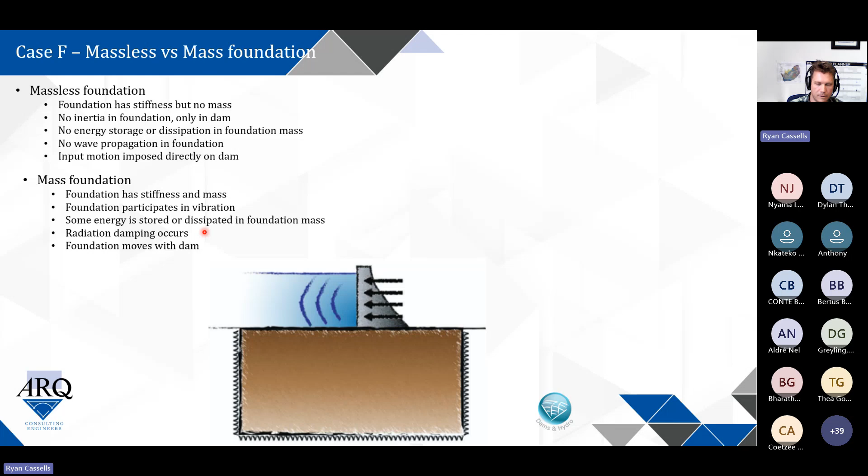As I said, it moves as a coupled system, so you don't just have the dam jumping around on the foundation - the dam and foundation sort of jump together, so there's a certain sense of agreement in the way that they get excited. For the results of case F, here's the average of all the contributors, comparing mass versus massless foundation.

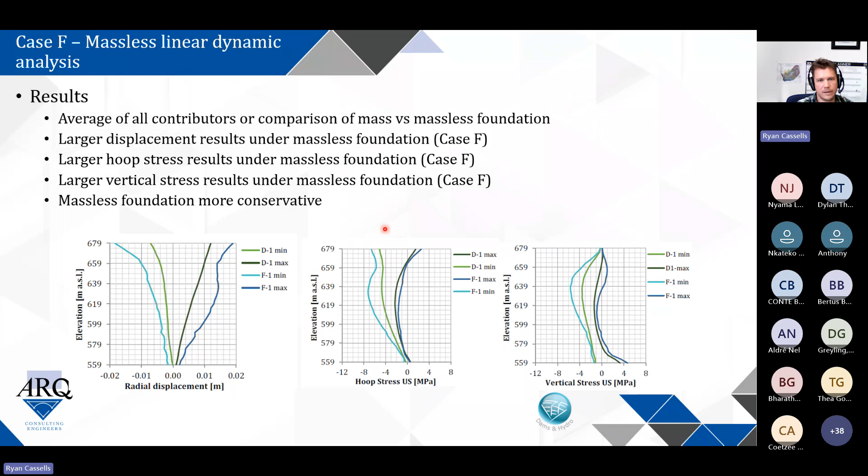The organizers averaged the displacements for mass foundation and massless foundation - case D1 being mass foundation, case F1 being massless. The radial displacements, light blue and dark blue, show the massless foundation with higher displacements. Similarly for hoop stress and vertical stresses, the massless foundation results in higher hoop stresses and higher vertical stresses. So you can definitely say in this instance the massless foundation is more conservative, which is most of the time the case.

So for theme A, what are the lessons learned? Finite element modeling is a tool to assist with analysis and design. It should not be trusted blindly. The benchmark workshop showed us that 12 expert engineers around the world with many years of experience undertaking to solve the same problem may still produce different solutions - so even the experts differ. Their FE analysis results are sensitive to what may seem like small modeling errors or input assumptions.

A linear elastic analysis approach should always be adopted prior to nonlinear analysis. Be wary of inherent numerical modeling anomalies or artifacts. Different numerical modeling software packages may produce different analysis results, even if the modeling inputs are identical. Effective numerical modeling is to some extent an art form that is learned with much experience, as you learn how to deal with these modeling artifacts.

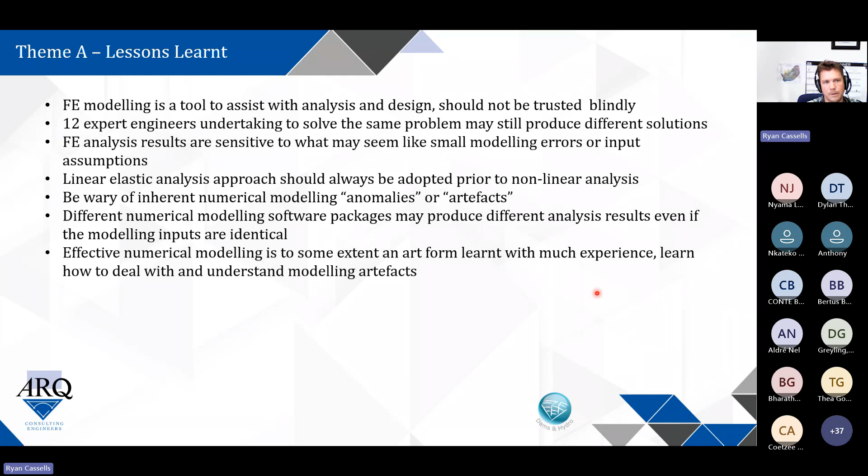So that's the end of my unpacking and discussion of theme A. As I said, I won't have time to do theme B and theme C, but the proceedings are available. I just want to have a look at one or two other things.

Okay, I've got 10 minutes left to my presentation. As I said, there's an extra bonus.

At the benchmark workshop, there was a paper that was published and written by two esteemed gentlemen known as Emmanuel Robbe and Jerzy Salamon. This paper was written on the ADSAS software. ADSAS is the Arch Dam Stress Analysis System.

ADSAS is a numerical modeling program which was developed in the 1960s for analysis of arch dams based on the trial load method. Recently, Mr. Robbe and Mr. Salamon actually released an updated version, ADSAS 2024, using the original Fortran code and an updated GUI.

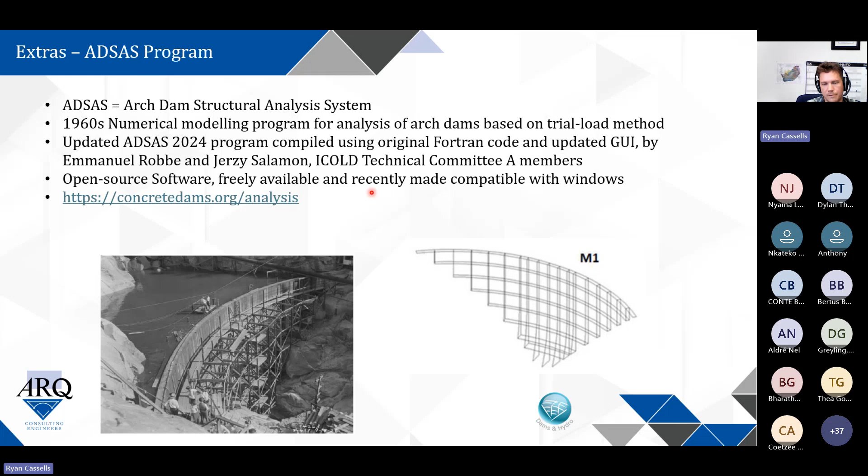So I've actually put a link here for the download of the software for all of those engineers out there who would like to do structural analysis of arch dams for information purposes. I know sometimes the modeling software can be quite expensive and it's not always available to all engineers, but this ADSAS tool is very useful to get a feeling for the analysis of concrete arch dams.

As I said, it was originally developed by the USBR in the 1960s. It was run on a Cyber 70 computer, requiring 39,000 cards and 240 subroutines. What's interesting is in the 1950s, a single trial load analysis could take from 6 to 12 months to do by hand for a single experienced engineer.

In the 1960s, ADSAS allowed various proposed arch configurations to be analyzed in a matter of minutes, drastically reducing the analysis time. ADSAS was used to design numerous notable historical USA arch dams, so it has been tried and tested.

So for those of you who want to use it for a dam safety evaluation of an arch dam, if you don't have the correct FEA software, I'd really propose looking into this. It can be seen as the arch dam equivalent of CADAM, which I know many dam engineers use for stability analysis of concrete gravity dams.

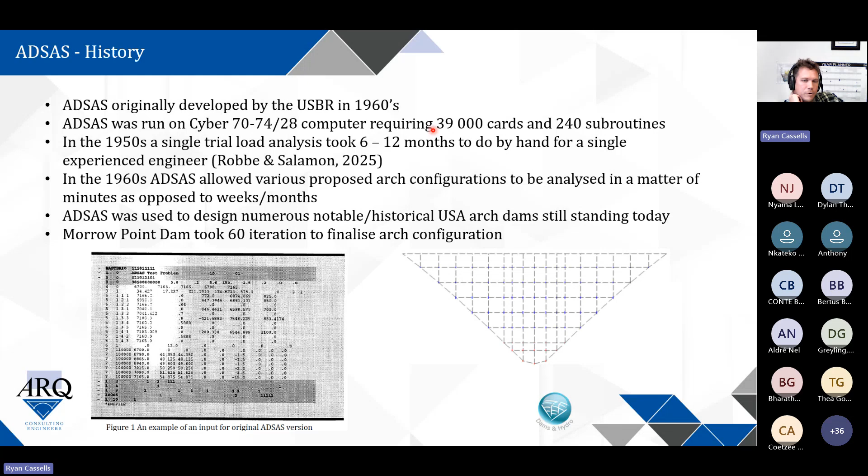Some interesting information: Morrow Point Dam, an arch dam in America, took 60 iterations to finalize the arch configuration. So imagine if each of those iterations took 6 months, you'd be busy for 30 years. So having the software drastically improved the efficiency of arch dam design in that era.

As I say, ADSAS was used for some existing dams in America. ADSAS has also been verified against modern-day FEA software in the paper published as part of these proceedings. They actually do some comparisons between the results from some of the FEA software.

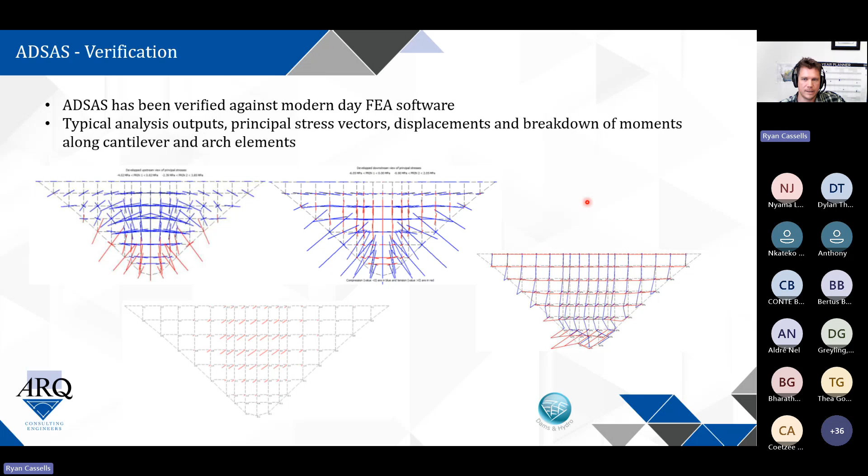Then finally, one of the things that I came to know of from being part of the workshop is that there is actually an open source, free, advanced numerical analysis FEM software package. It's called Code Aster, and it was developed by EDF, a French dam engineering company, developed in-house by them.

The software was actually used by contributor P05 in the Benchmark workshop, and the results correlated very well with all the other state-of-the-art software, such as Abaqus and ANSYS. The software has very little limitations, very powerful and capable of advanced numerical analysis: thermal, seismic, eigenvalue, static, nonlinear, fluid elements, FSI, free field, all of those.

There's one small drawback: it's not very beginner friendly, but that goes to say for any FEA package. This one uses command files usually instead of a GUI, but I believe there is a GUI that has recently been released called Salome Meca. I've again put the link for download over here. So if there are any dam engineers who have complex dam problems and they want to give this a try, I think they should definitely look into that.

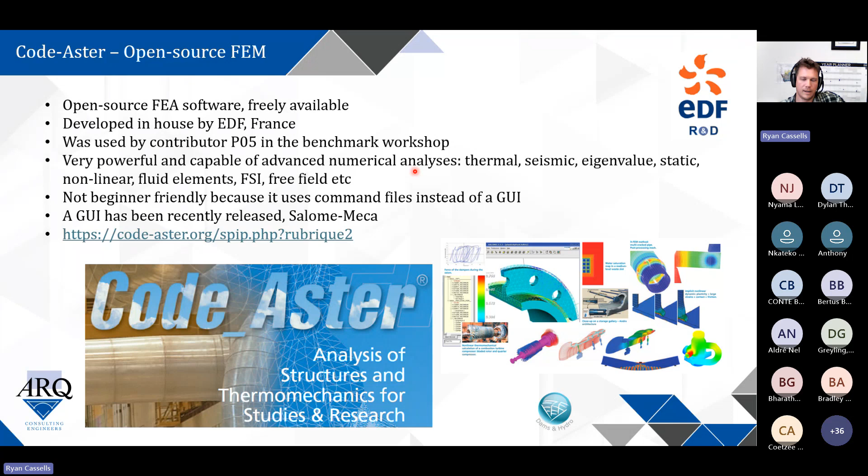So you can see as the field is advancing, there are people releasing open source FEA software, which is available to everyone. So you don't need to have expensive software packages.

In conclusion, the ICOLD TCA benchmark workshop was held in Sofia, Bulgaria in 2025. Three themes were studied: Theme A, an FEA analysis of an arch dam, and Themes B and C, embankment and CFRD dams.

All the contributors and participants shared knowledge, advice, and tips on numerical analysis of dams. The proceedings were published and are freely available as open source literature. The benchmark proceedings serve as a valuable analysis reference for beginners to test their ability.

I think this is very important. It gives you a lot of confidence in your results. If you want to start getting into numerical modeling, you can practice by using even the inputs that they provide in the benchmark analysis, and you can compare your analysis results.

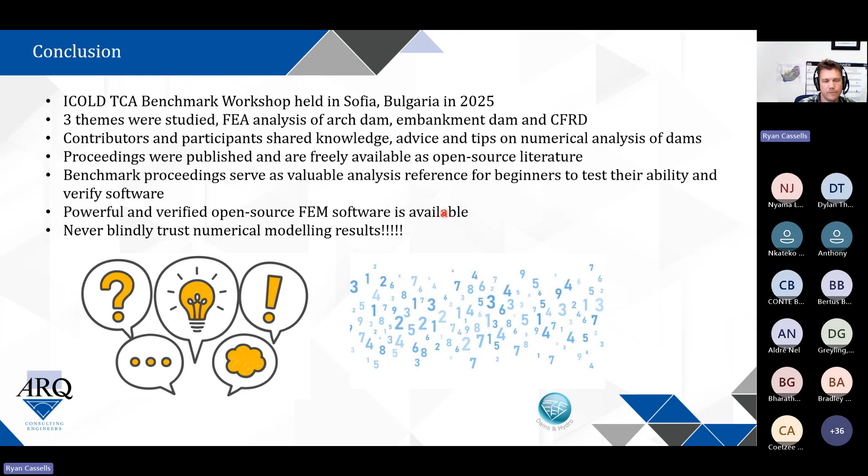There is powerful and verified open source FEM software available, and never blindly trust numerical modeling results.